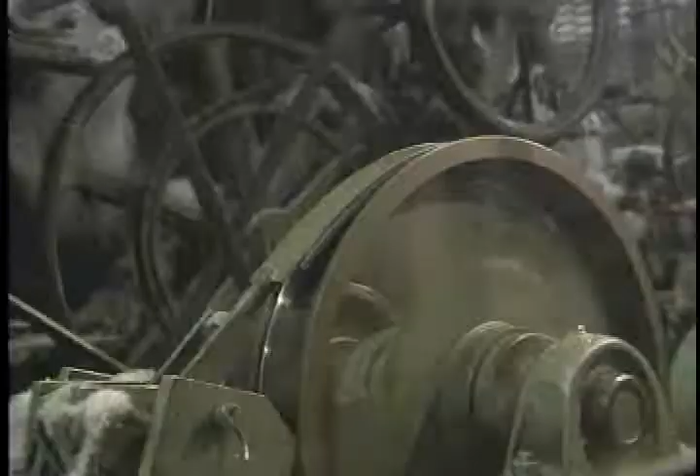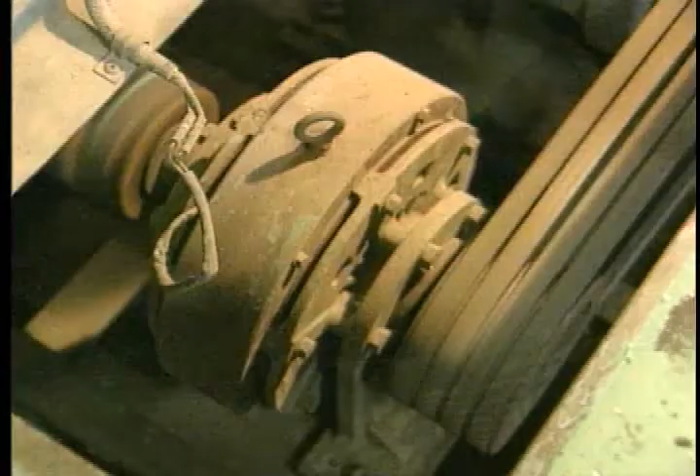Brakes and clutches are used in industry, and their continued reliable operation is critical. Downtime is usually expensive, and failure of a brake or clutch can mean serious property damage and personal injury. To keep things running efficiently and reliably, you must be able to set up and maintain brakes and clutches correctly, and you should be able to spot problems early, before they lead to a breakdown.

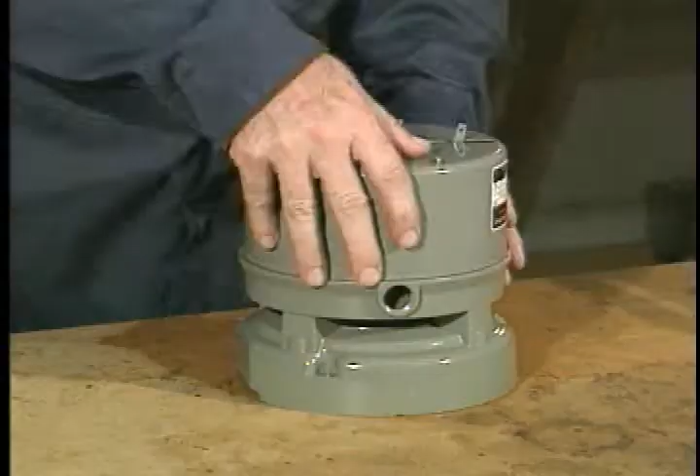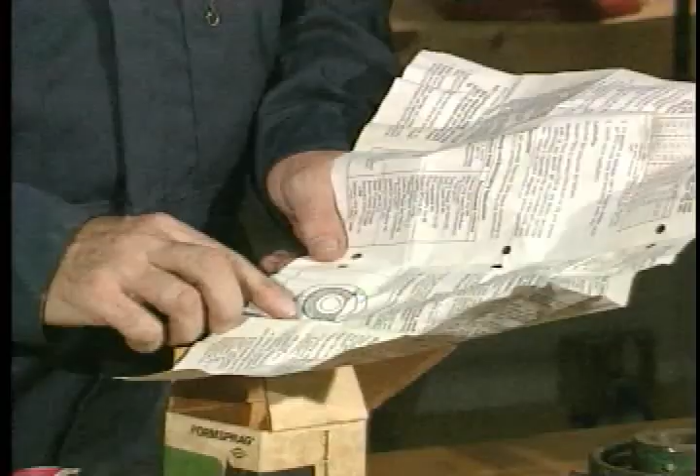In this lesson, we'll see how brakes and clutches work, what kind of maintenance they require, and what conditions can cause them to fail. We'll also show you the kinds of operating conditions that accelerate normal wear, and how to keep them in good operating condition.

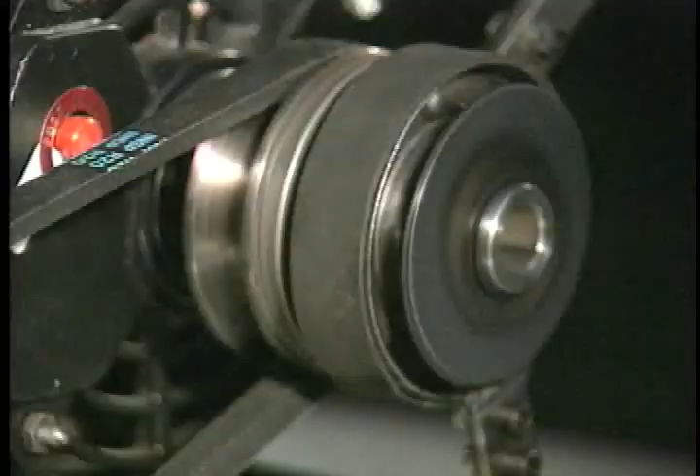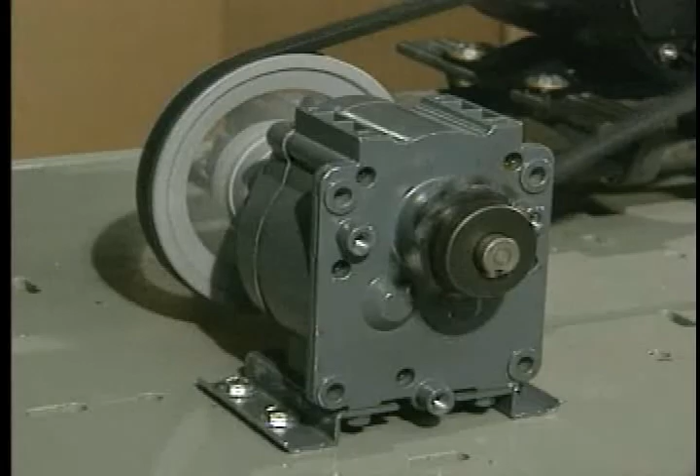Let's start with what clutches and brakes do. Clutches have an input connected to a driver, usually a motor, and an output connected to whatever is being driven. Most clutches can disconnect the input and output completely at startup, letting the motor start up and run without a load. Most can also slip, so the motor can bring the load up to speed gradually. Finally, clutches can connect the input and output firmly, so the motor drives the load at full speed with no slip. In most cases, when a clutch is fully engaged, both the input and output turn at the same speed.

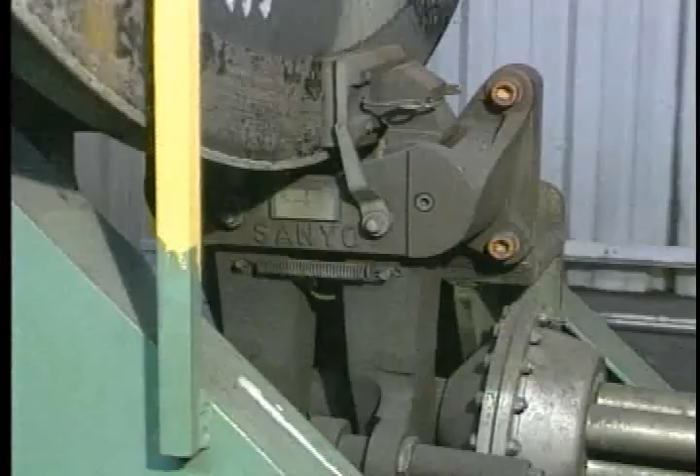On the other hand, a brake prevents the input from turning. When the brake is released, the input can turn freely. When it slips, there's some drag on the input. And when the brake is fully applied, the input is locked to the output—nothing turns. Now, some clutches and brakes do not allow slipping. These positive engagement clutches and brakes are either locked up or free, nothing in between, no slipping.

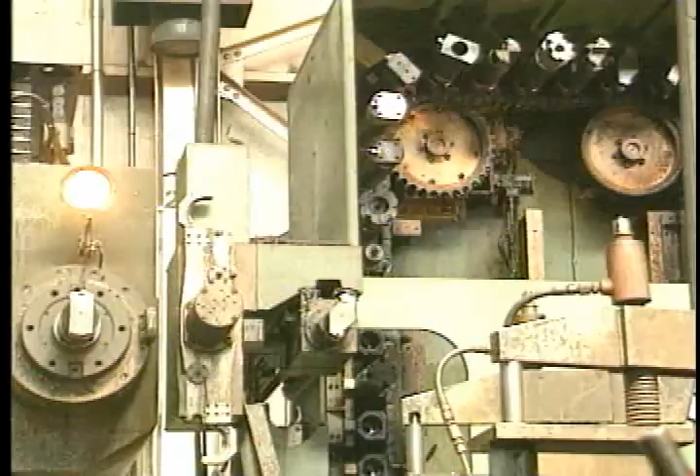Positive engagement brakes are often used to hold a shaft in position while a tool is changed or a machining operation performed. Some positive engagement clutches and brakes engage or disengage automatically, depending on which way things are turning.

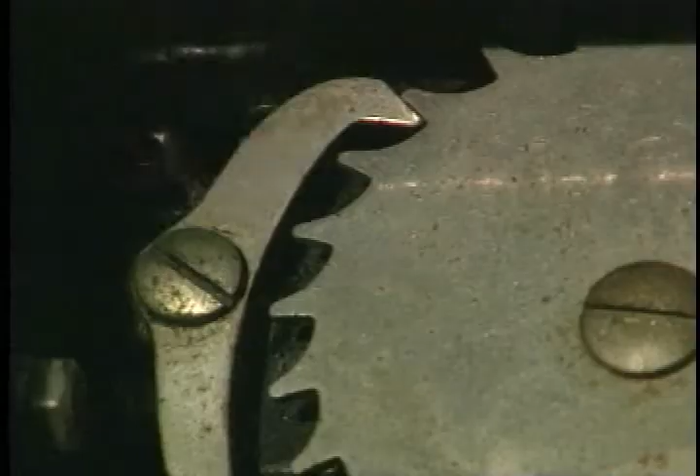A ratchet is a simple example of a one-way positive engagement brake. The wheel can turn freely in one direction, but will not go the other way. Sprag or cam clutches do the same thing, but they are smoother and quieter because they have no teeth.

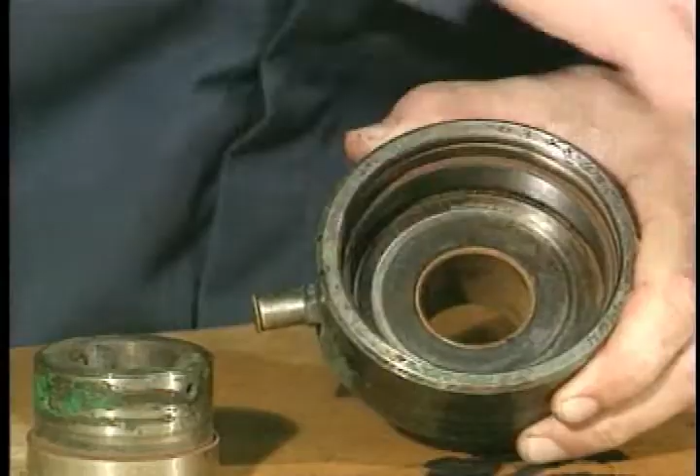Instead, a smooth cylinder, called the inner race, rotates in one direction inside an outer race. Between the two races are sprags or cams. When the inner race rotates in one direction, the sprags or cams cannot grip the outer race. But when the direction of rotation is reversed, they jam tightly between the two races, connecting them.

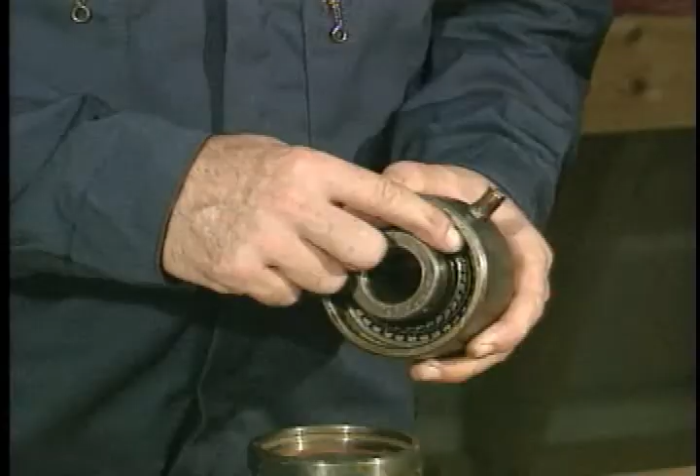When used as a brake, one race is fixed. The other race, like a ratchet wheel, will turn freely in one direction, but won't turn at all in the other direction. When used as a clutch, the output can coast, freewheeling or overrunning when the input slows or stops.

If you ever have to replace a one-way clutch or brake, make sure the new unit engages or locks up in the same direction as the old one did. Some lock up clockwise, some counterclockwise.

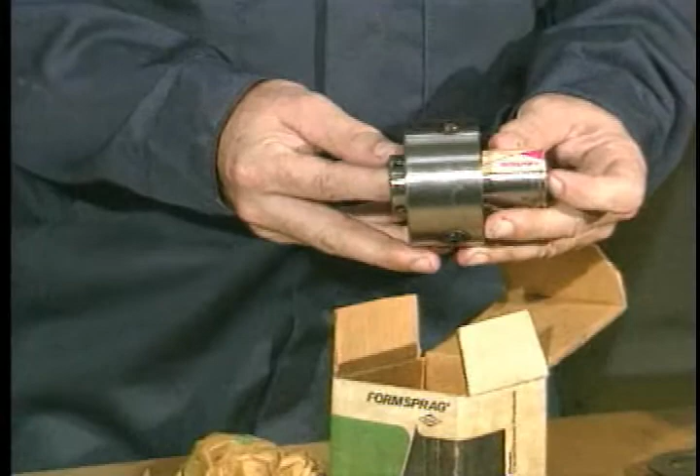Virtually the only maintenance required on a sprag or cam clutch or brake is proper lubrication. Most units are mounted on horizontal shafts and use oil, but sometimes a grease will be required when the unit is mounted vertically. In either case, use the lubricant specified by the manufacturer.

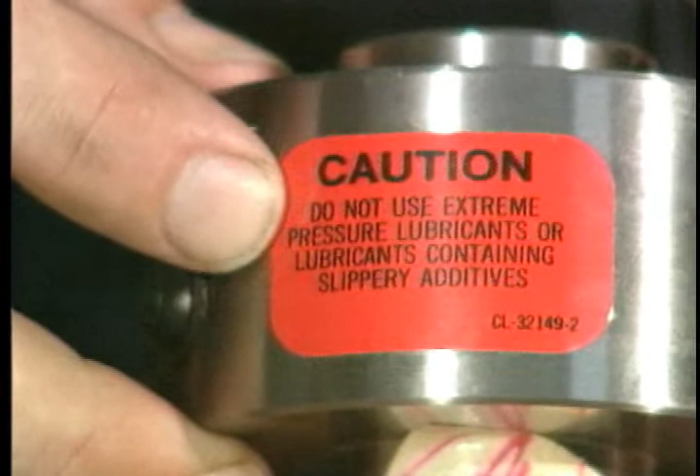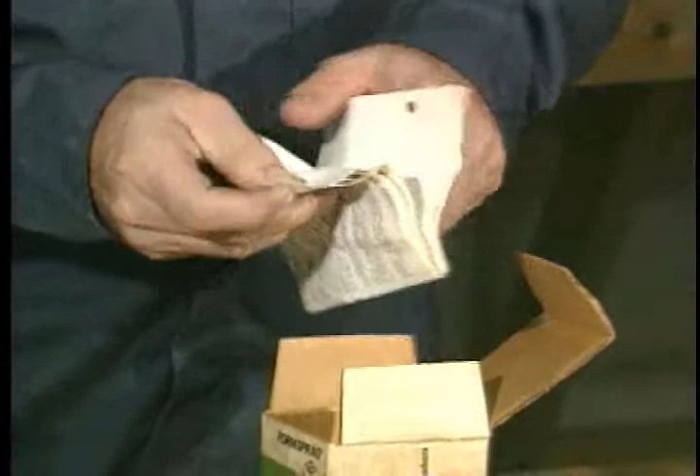Never use a heavy oil or any lubricant rated for extreme pressure service, because it may prevent proper gripping of the sprags or cams. Do not overfill—too much oil will increase drag. Half full is generally enough, especially when speeds are high. Slower operation can tolerate higher fill levels, but again, follow the manufacturer's instructions.

Okay, ratchets, sprag clutches, and other positive engagement clutches and brakes do not allow slip. They are either disengaged or locked up. However, most clutches and brakes can slip, and this allows them to start and stop loads smoothly.

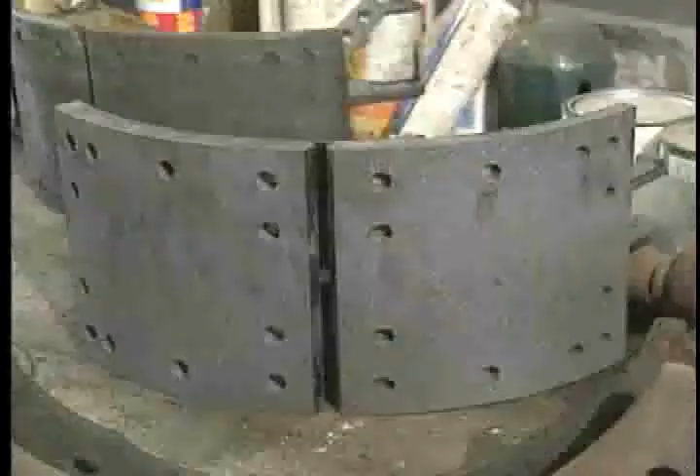Frequently, the slip takes place between dry friction facings and a steel surface. The friction facings are usually non-metallic composition linings, although sometimes metals like brass are used. The steel surface may be either a disc, like this, or a drum, like this.

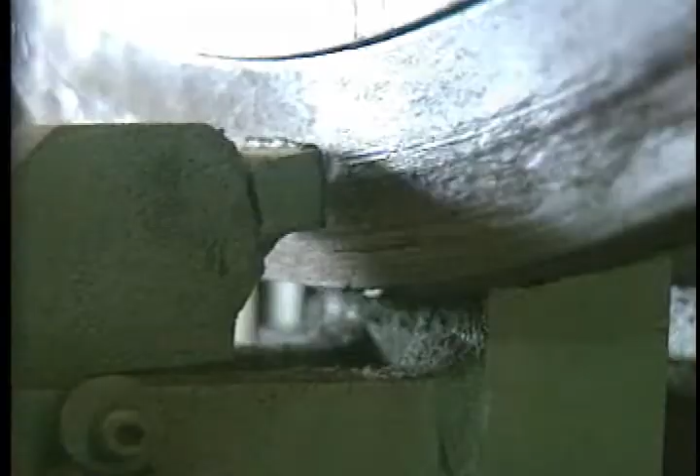Friction allows a clutch to transmit the torque that accelerates and drives the load. And it allows a brake to slow the load down and stop it.

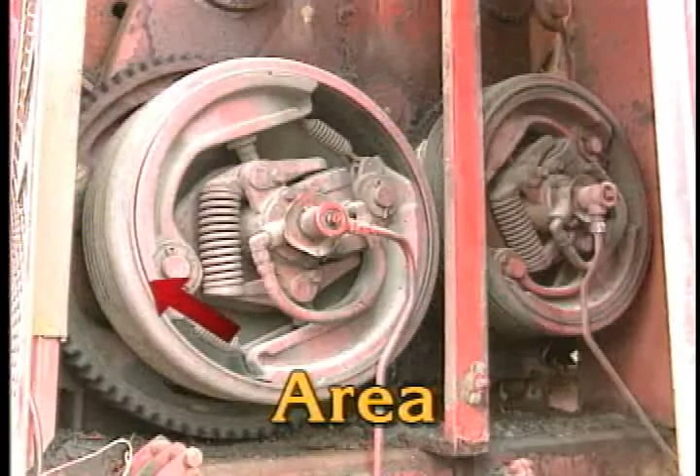Friction depends on three things. One is the area of the surfaces that are in contact with each other. The larger the friction-facing area, the more torque a brake or clutch can transmit. To increase friction, many clutches and brakes may have multiple friction surfaces.

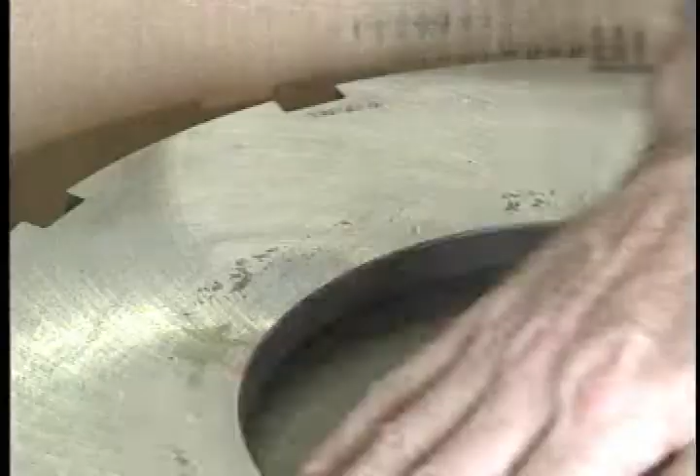Another factor that determines friction is the condition of the contacting surfaces. In most clutches and brakes, these surfaces must remain dry and clean. Moisture or any other contamination can drastically alter the friction and change the performance of the brake or clutch.

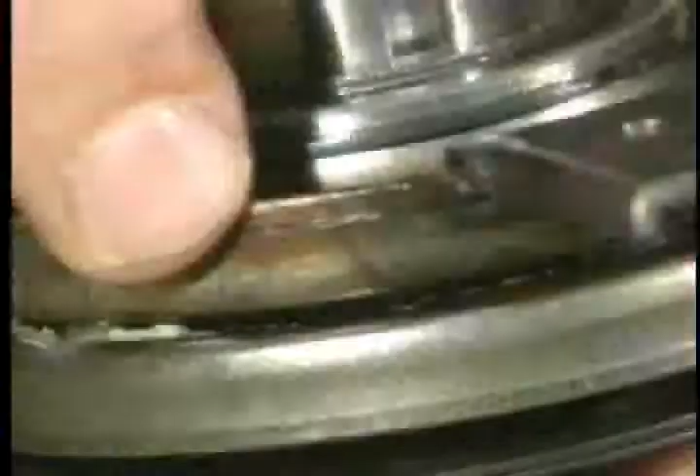Friction also depends on the pressure between the friction facings and the steel surfaces. In some clutches and brakes, both the contacting surfaces may move, so the force may have to be applied through a thrust bearing of some kind.

Whatever type of bearing is used, it may require maintenance from time to time. Sometimes that will mean lubrication, other times adjustment of components. Be sure to follow the manufacturer's instructions.

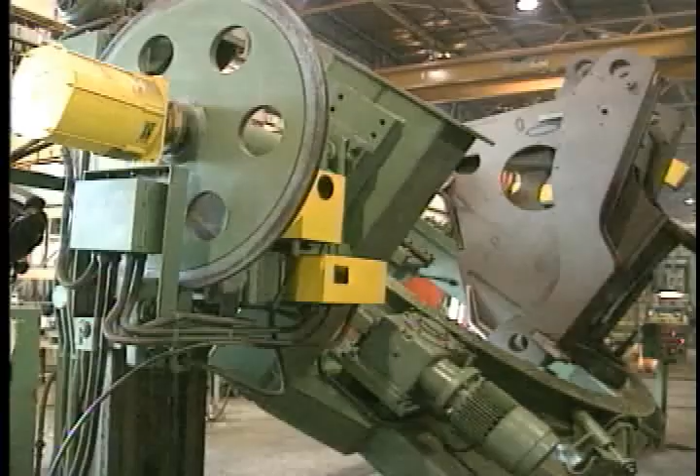Now, just because a clutch or a brake is designed to allow slip does not mean it is intended to slip all the time. Most dry friction clutches and brakes are designed for intermittent slip only.

Slipping that occurs too often will wear out the clutch or the brake. Slip also produces heat. The longer the period of slip and the greater the pressure while the slip occurs, the greater the heat produced. Now, heat causes lots of problems.

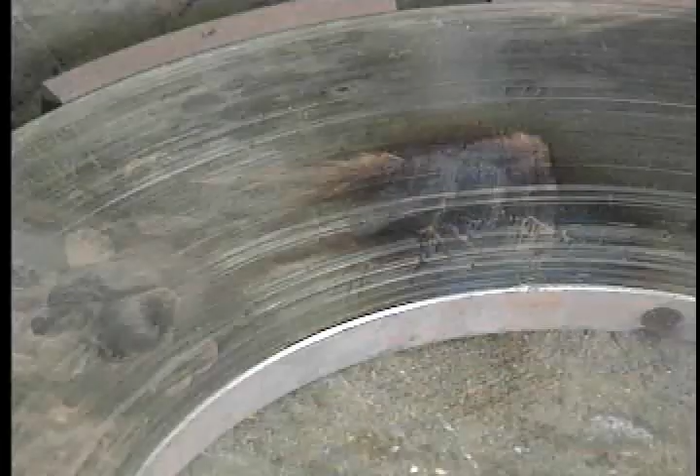Brakes that are overheated may fade, and an overheated clutch may not be able to drive the load without slipping. Clutches and brakes that get hot enough to smoke may be seriously damaged. Overheated friction-facing material on brakes and on clutches can weaken and break up, or it may just wear away rapidly.

Very high heat can cause steel drums and discs to warp or crack. Nearby bearing seals may deteriorate. If lubricants leak out into hot parts, smoke and fire is possible.

The important thing to remember about slip in friction clutches and brakes is that any more slip than normal will cause excessive wear and heat and early failure.

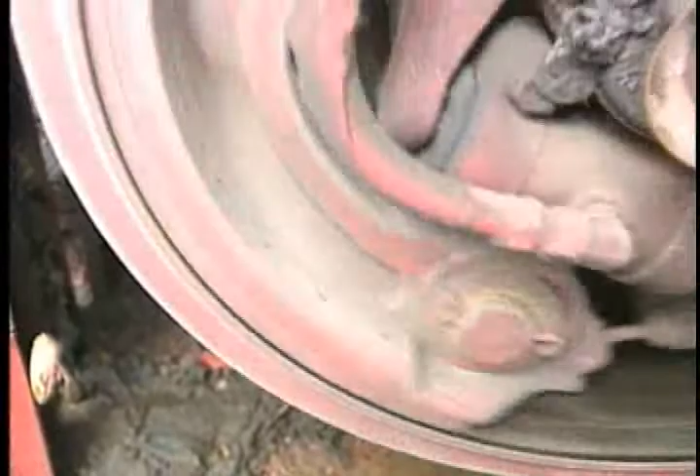For example, a clutch which fails to disengage fully or a brake that drags will heat up and wear out very quickly. If some parts are warped, bent, or binding, the friction facings and the steel may not be separating completely because the gap between the facings and the steel may be very small.

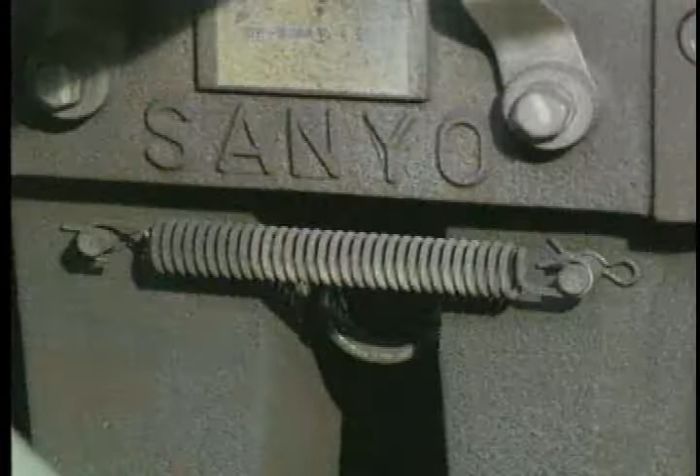Many units have springs of some kind intended to push the facings apart when the pressure is released. They may be weak or broken, especially if an operator has been riding them or the operating linkage requires adjustment.

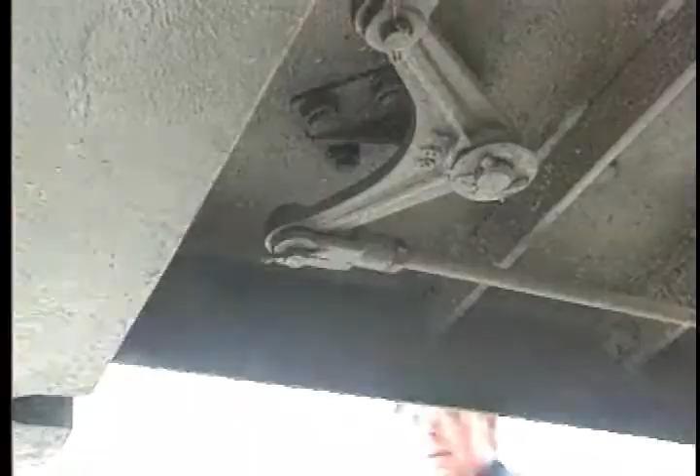Sometimes, of course, clutches slip and brakes cannot hold the load because the load is too large. Something in the machinery could be tight, binding, or overloaded.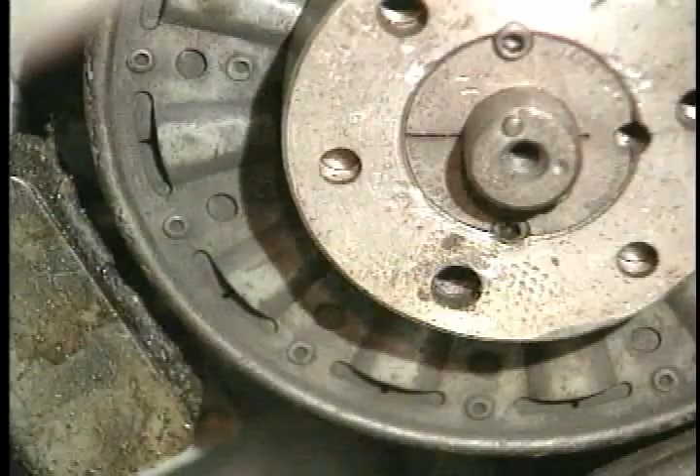Clutches and brakes may also wear out if they are cycled too frequently. A clutch can start a load and a brake can stop a load only so many times an hour. Cycling it faster than its rating will cause it to overheat because it will not be able to dissipate the heat generated during each cycle.

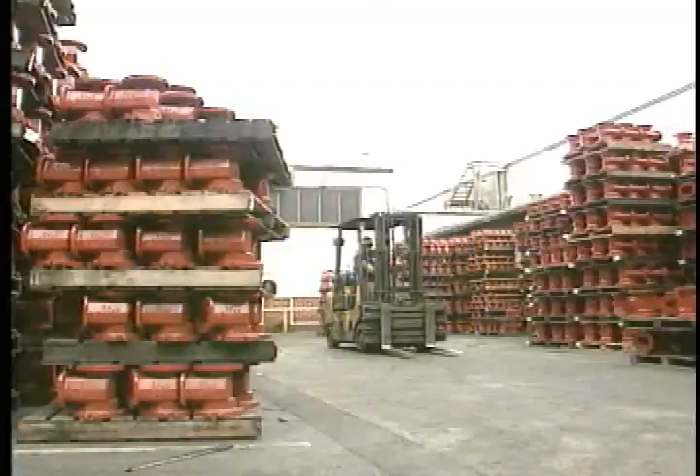However, even if the duty cycle is normal, a clutch or brake may slip more than normal because of inadequate friction. Lack of friction can be caused by many things, but the most common are inadequate pressure, contamination of the friction facings, or damage to the friction facings.

Anything that interferes with full pressure being applied will cause slip. For example, if an operator rides a clutch or brake, it will not be fully engaged. In addition to slip and heat, riding a clutch is also likely to wear out the thrust or throw-out bearing,

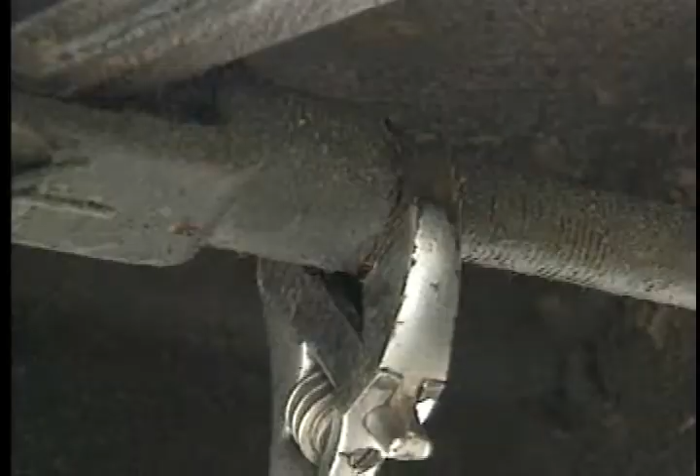which disengages the clutch. Sometimes, worn or misadjusted linkages can reduce pressure enough to cause slip. In some units, inadequate pressure can be a result of wear of the friction facings.

The condition of the friction surfaces can also cause excessive slip as well as other clutch or brake problems. Contamination can cause some clutches and brakes to grab and chatter or slip. To help prevent contamination during operation, make sure all seals are replaced when necessary. And when installing new clutch or brake facings, work in a clean area.

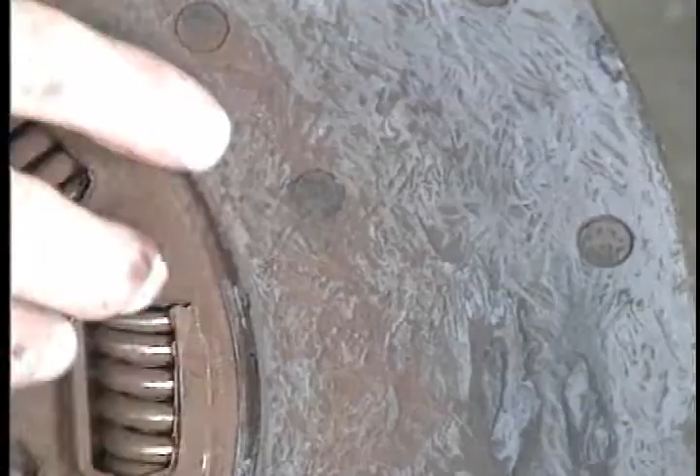Some wear is unavoidable, but excessive wear can expose the screws or rivets which hold the friction facings in place, and then the steel surfaces can become grooved and damaged. Discs, plates, and drums may all need to be resurfaced or replaced if wear is allowed to become excessive.

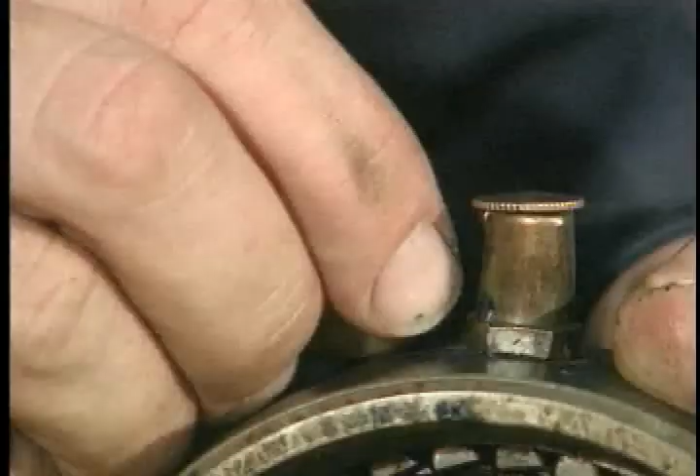Finally, contamination may also roughen up the surfaces and lead to wear. To help keep out grit and dirt, make sure all inspection and lubrication covers are in place.

Okay, now let's apply this information to the maintenance and troubleshooting of specific friction units that you're likely to find in your plant.

But first, let's talk about asbestos, which may still be used in brake and clutch facings. During disassembly and reassembly, make sure you know the procedures for working with asbestos in your facility. Never blow out dust with an air hose, and do not drill, saw, grind, or file friction facings without some way to collect the dust safely.

Now let's look at procedures for several types of friction clutches and brakes: the overload or slip clutch, the centrifugal clutch, and electrically operated, pneumatically operated, and hydraulically operated clutches and brakes.

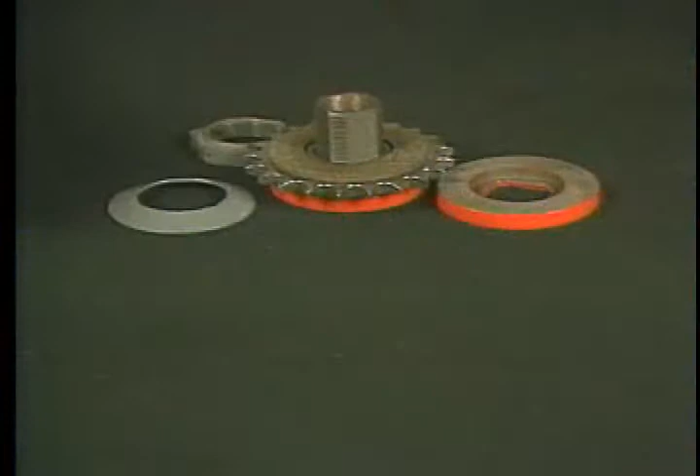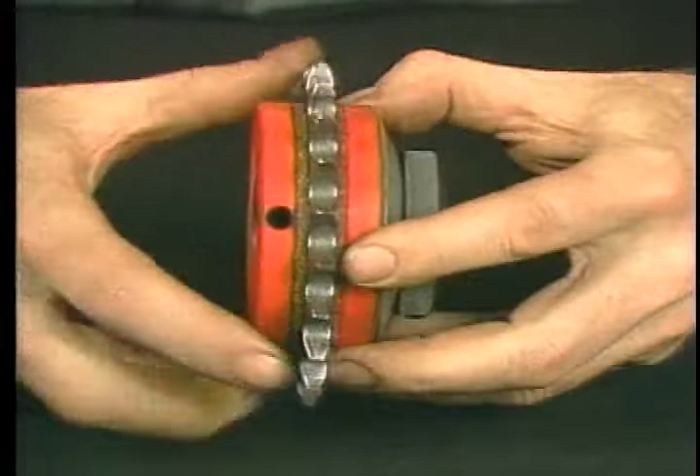Slip clutches are very common and fairly simple. Springs squeeze the friction facings on a steel surface hard enough to prevent slip during normal machine operation. But if the machine is overloaded, the clutch slips. Usually, the only maintenance they need is an occasional readjustment as the friction facings wear down. When this happens, the springs apply less and less pressure, and the clutch may slip before it is overloaded.

Centrifugal clutches often use springs to hold the facings away from the drum until the speed of the input shaft reaches its cut-in speed. But as the facings wear thinner, the springs must stretch farther, and the unit may slip.

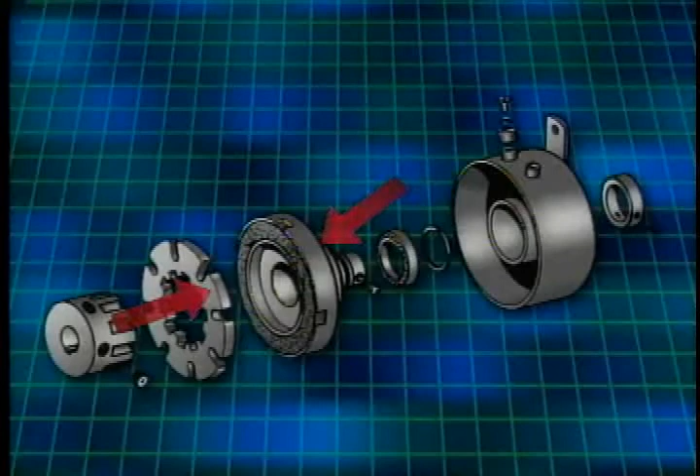Many friction clutches are electrically operated. Current in an electromagnet produces the force that presses the friction facings and the steel surface together. If the electromagnet is attached to the input or to the output, it must rotate also, and current is usually fed to it through slip rings and brushes.

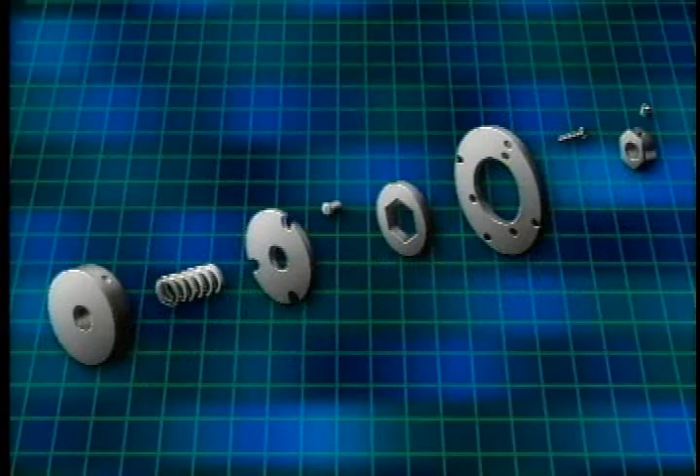Electrically operated brakes work much the same way, but are usually a little simpler because there is only one rotating part, and the electromagnet can always be stationary.

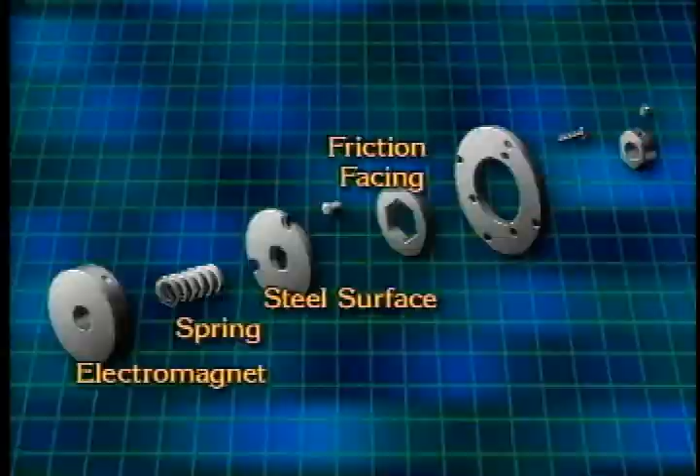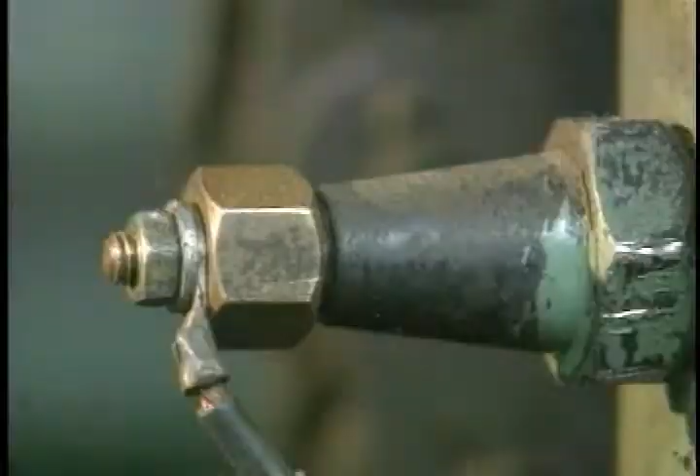Electric brakes and clutches usually have few problems. If they don't work when voltage is applied, check to see that the armature is free to move and that the coil is not burned out. If there are slip rings and brushes, make sure they're not sparking, worn, or dirty. If they are, replace them.

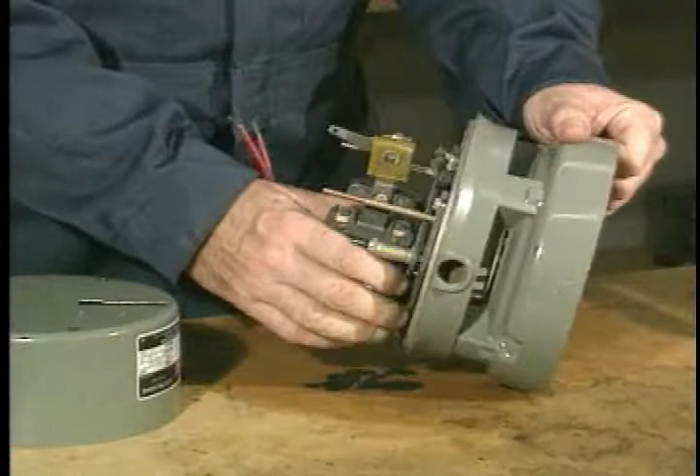Electric brakes mounted directly on the motor are very common. Generally, they keep the motor braked whenever power is not applied, so they are released only when power is sent to the motor. Any malfunction which interrupts the electrical supply to the motor also applies the brakes.

Springs usually supply the force that keeps the brake applied as long as the power to the motor is off. When the motor is switched on, a solenoid coil wired into the motor circuit pulls the spring back, releasing the brake. In some units, the release mechanism automatically compensates for wear of the friction facing. Other units, however, may require periodic adjustment.

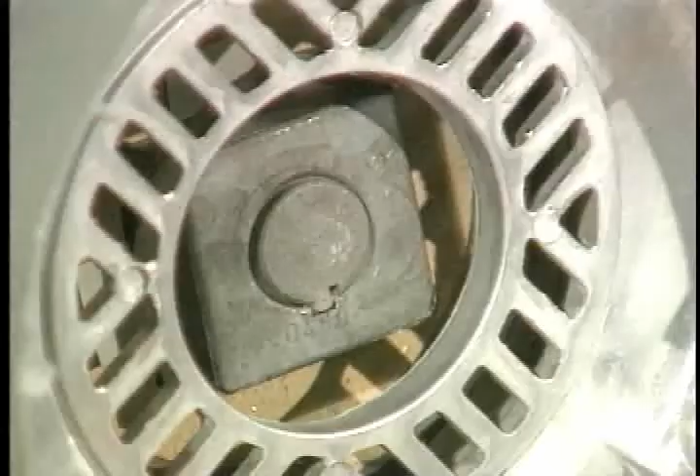Usually, troubleshooting this kind of unit is easy. Make sure the release linkage is free to move, that the discs are not warped, and that they do not bind in the housing or on the shaft, and that the solenoid and its coil have not burned out. You can use an ohm meter to test resistance or continuity across the coil.

If the brake does not stop the load fast enough, compare the friction disc thickness to the manufacturer's specifications. Replace the friction disc if it is too thin. Or the spring may require adjustment. Tightening the spring will apply more pressure, stopping the motor faster.

Some of these kinds of brakes have a manual release, but don't rely on it to hold the brake completely off. If the solenoid is not holding the brake fully released, do not run the motor until you find out what the problem is.

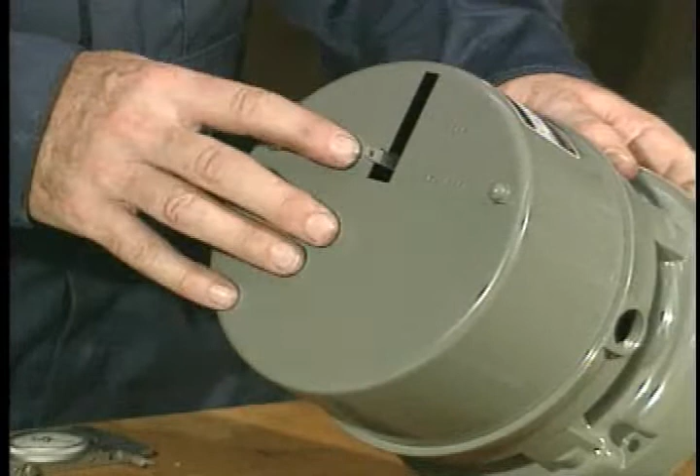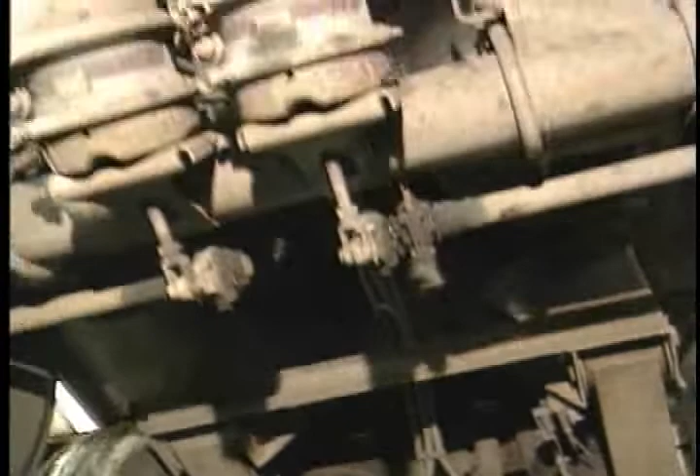Clutches and brakes are also operated pneumatically with air and hydraulically with fluid. Some brakes are fail-safe units in which pneumatic or hydraulic pressure prevents the brakes from being applied. If pressure is lost, the brakes lock up.

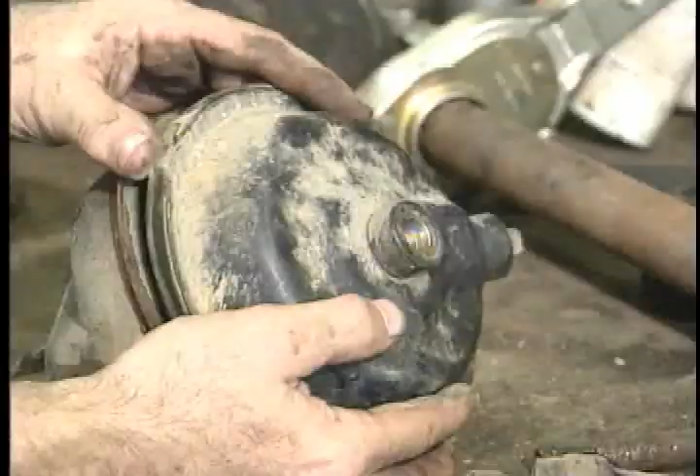Pneumatic brakes and clutches are typically operated by a piston with seals or by a flexible diaphragm. Compressed air pushes against the diaphragm, which compresses a spring and applies the brakes.

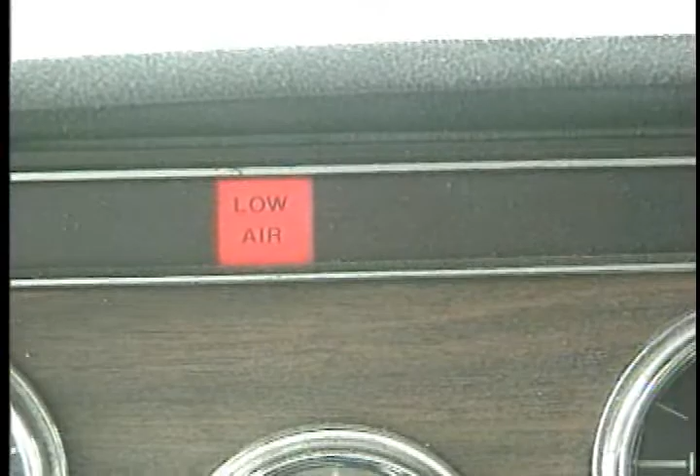Troubleshooting is usually simple. If the unit does not come on or if it slips a lot, the first thing to check is the air pressure or fluid level. Check the friction facings for wear or for damage or for contamination. Check the springs. They may be weak or broken or out of adjustment.

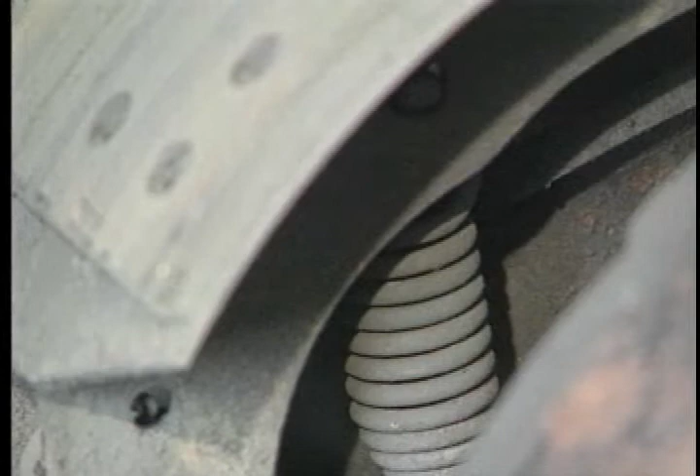Finally, check for air or oil leaks in the piston seals, the diaphragms, the unions, and the hoses. Eventually, if used often enough, every brake or clutch will have to be rebuilt or replaced.

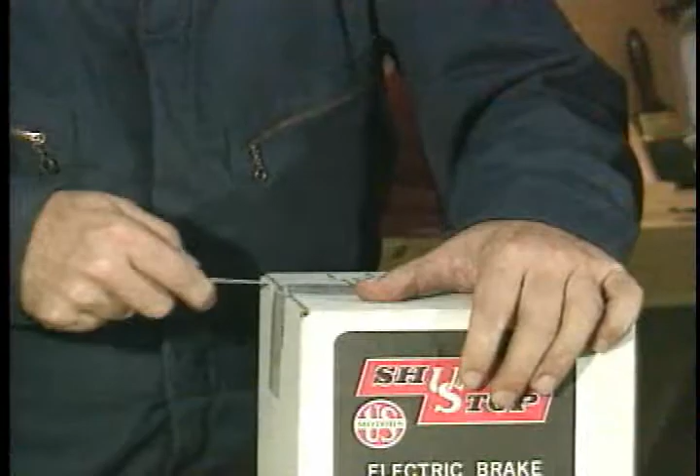Rebuilding them can often be done by ordering replacement parts from a supplier. These parts may be supplied as individual components or as rebuild kits.

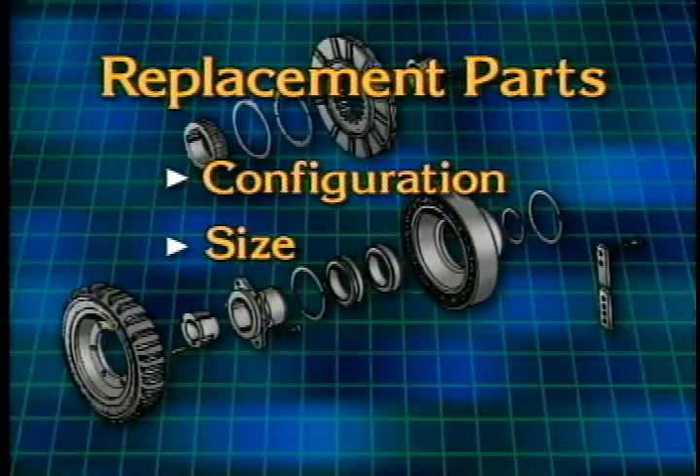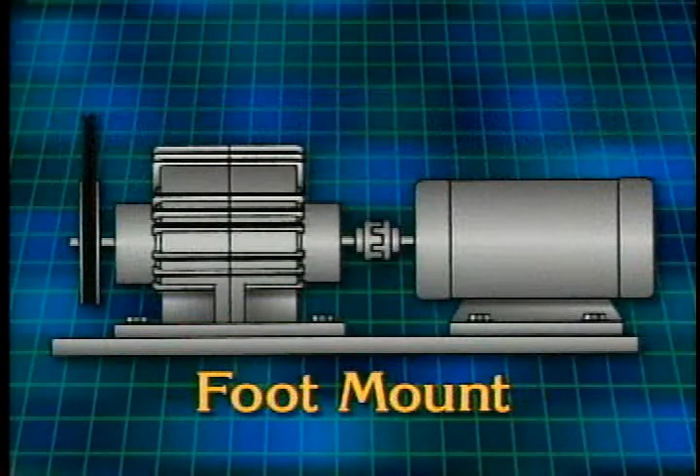When replacing an entire unit, there are three main areas to consider: the configuration of the brake or clutch, the size, and the installation. There are three major ways to mount a brake or clutch: the common C-face mount directly on the motor, a foot mounting, usually between the motor and the gearbox or between the motor and the load, and a shaft mount, in which the shaft is split.

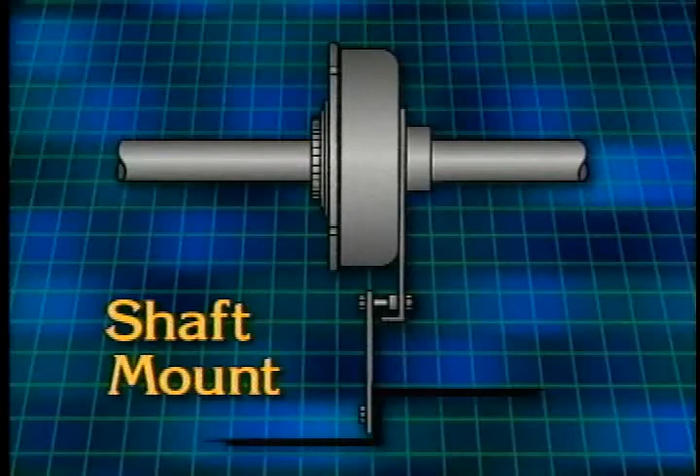The shaft goes straight through the brake or clutch, or part of the unit is mounted directly on the machine. Normally, unless the application is changing, the replacement unit will be the same configuration as the original installation.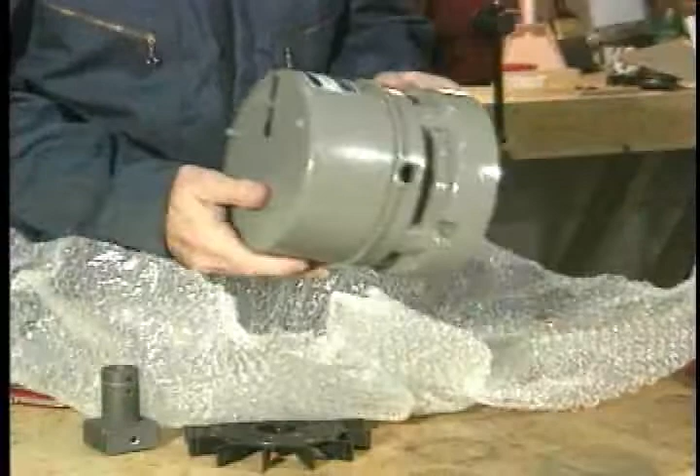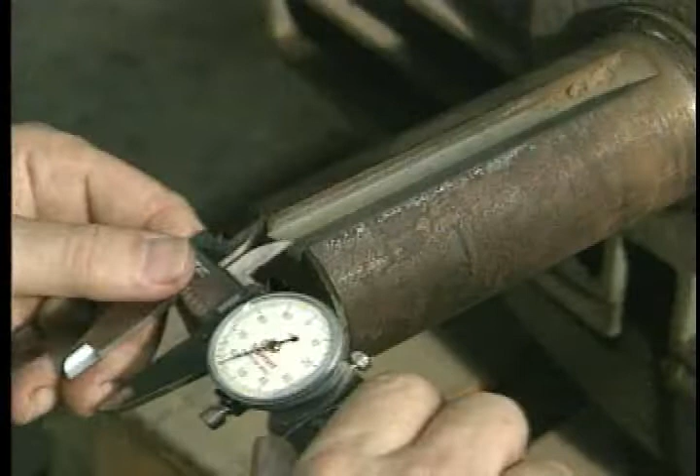However, the sizing of the unit may change, usually because of a change in the application or because the old unit wore out too quickly. The first step, of course, will be to check the dimensions of the old unit to make sure whatever new unit is ordered will actually fit.

Sometimes special units or adapters may be ordered to fit existing shaft sizes or existing bolt patterns in the mounting. This can significantly reduce the time and expense of installation. If the unit is electrical, check the required voltage level as well. Typical voltages are 6 volts, 12 volts, 24 volts, and 90 volts.

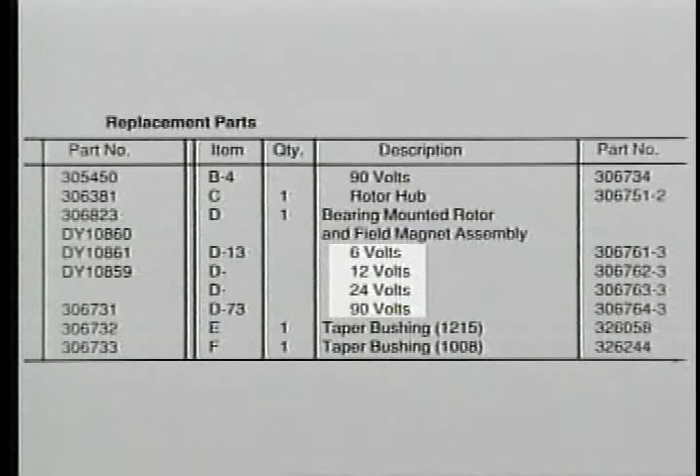Next, you must determine the size and model number from a particular manufacturer. If the same manufacturer is being used, then the model numbers may match, but if suppliers have changed, you may have to select a substitute.

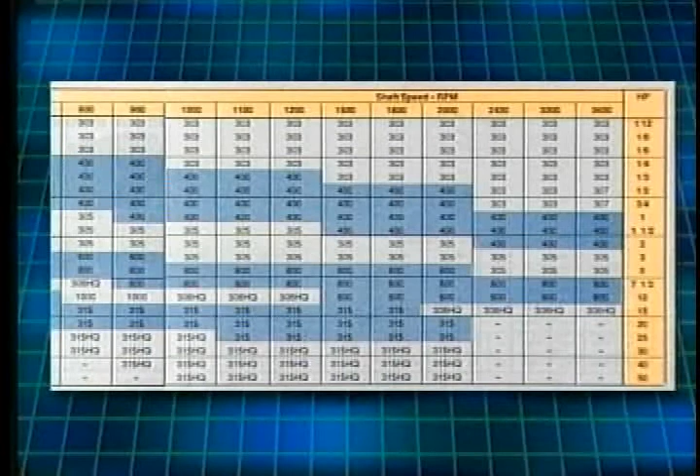Generally, this will be done based on the horsepower of the system and the shaft speed at the clutch or brake. Most manufacturers provide model selection charts for their products, which can be used for the most common applications.

For example, if an application is powered by a 40 horsepower motor operating at 1800 RPM and powered through a 2-to-1 reducer, this manufacturer's selection chart indicates that a Model 315HQ will be required.

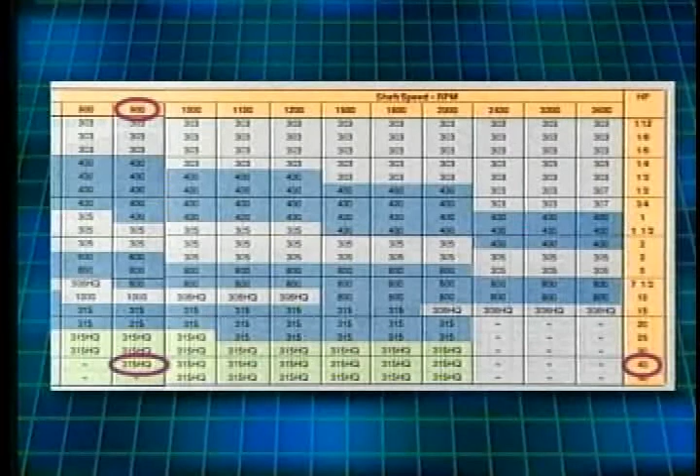Notice that most sizes of clutches and brakes can be used in a wide variety of applications. As long as your application falls somewhere close to the middle of the range, the new unit will probably operate well. The exceptions will be if the unit must cycle on and off frequently, if loads are too great, or if temperatures are too high.

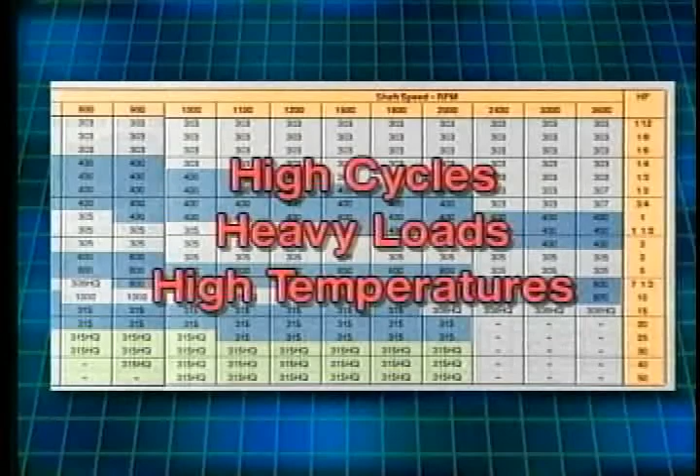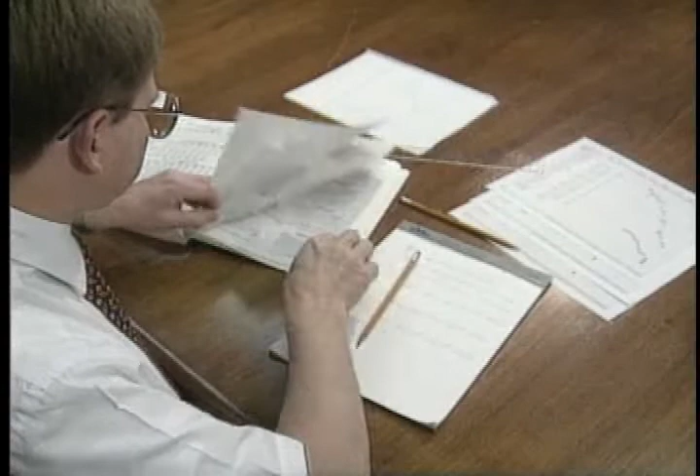In general, if the unit must cycle on and off more than 15 times per minute, or if a more cost-effective match between the brake or clutch unit and its application is desired, then a more detailed analysis can be undertaken. This usually involves calculations of actual inertia, torque, power, and heat dissipation over time in order to develop an estimate of the actual life of the brake or clutch in a particular application.

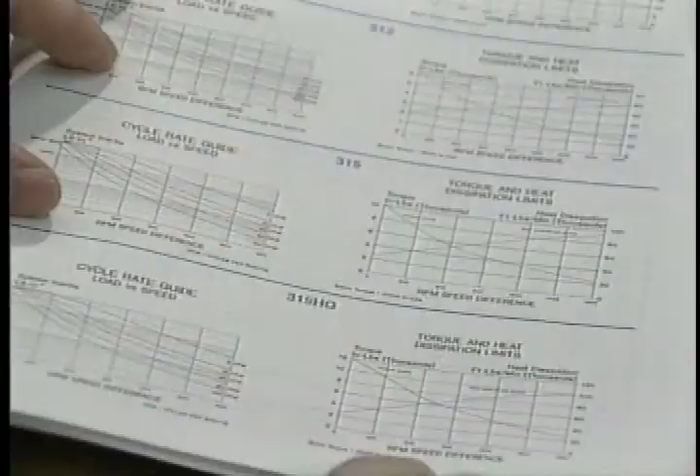After a unit is selected, it must be mounted and aligned. Remember to lock out properly before starting any work at the site. Make sure you know the proper lockout procedure. Make sure you follow it.

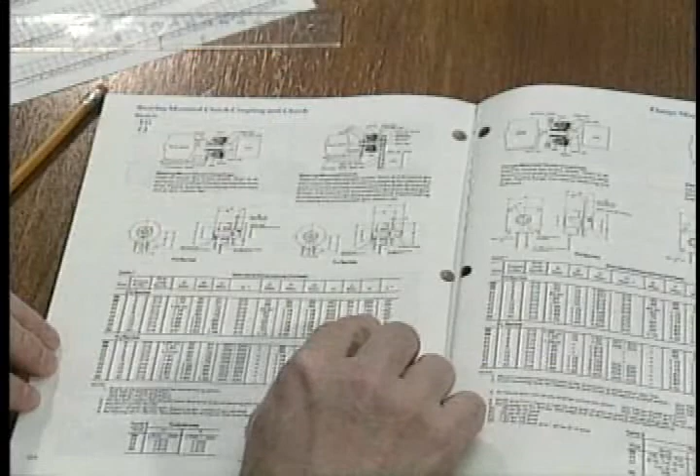You should not attempt to install a new unit unless you are thoroughly familiar with the manufacturer's specifications. Most units require precision alignment, and many require careful adjustment in order to make sure that the correct gaps are maintained after the installation is complete.

When mating a new brake or clutch with an old installation, be sure to check for shaft runout and wobble. This may occur as a result of worn bearings in the motor or in the driven machine, and may dramatically reduce the life of a brake or clutch.

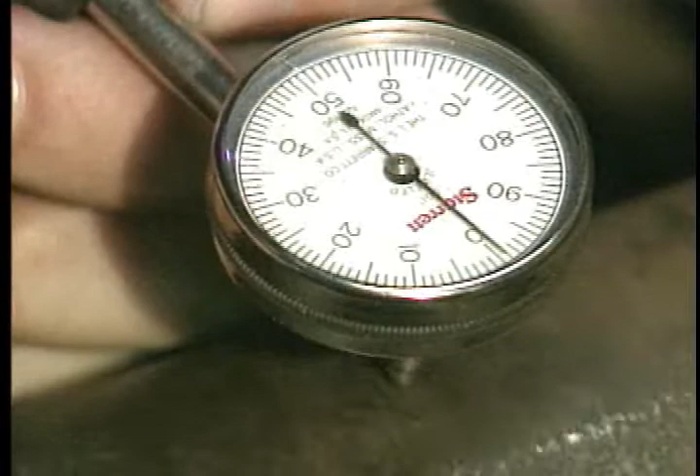After installation, many brakes and clutches may have to be run in or burnished to make sure the friction faces mate properly and that they can develop full torque. Usually, this will happen quickly under normal operating conditions.

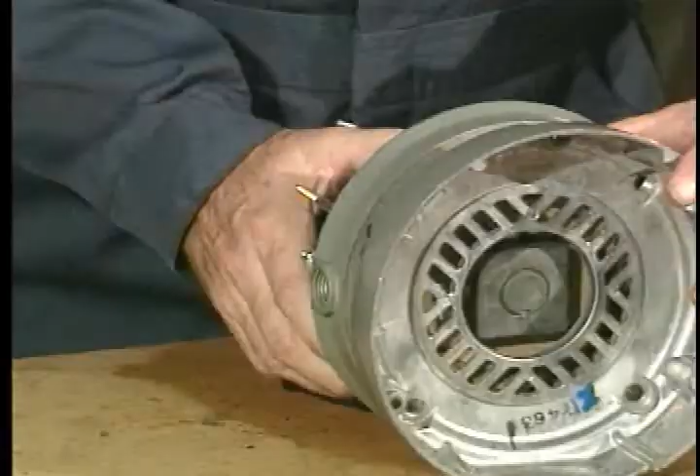In this lesson, we've seen how several different kinds of brakes and clutches work. We've seen what kind of maintenance they usually require. We've seen what conditions can cause them to fail. And we've looked at the major factors to consider when they must be replaced.

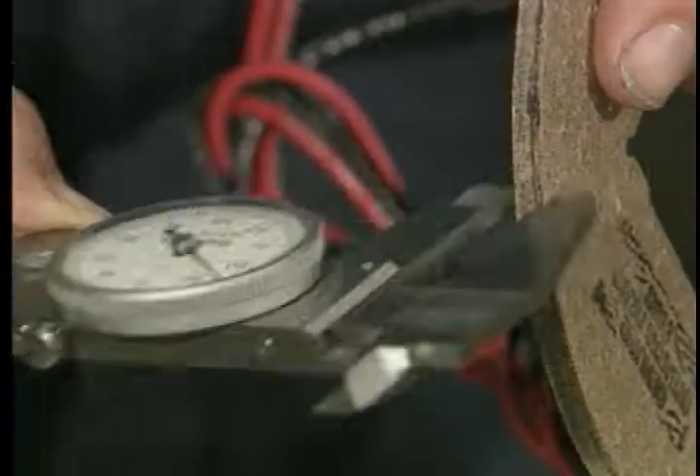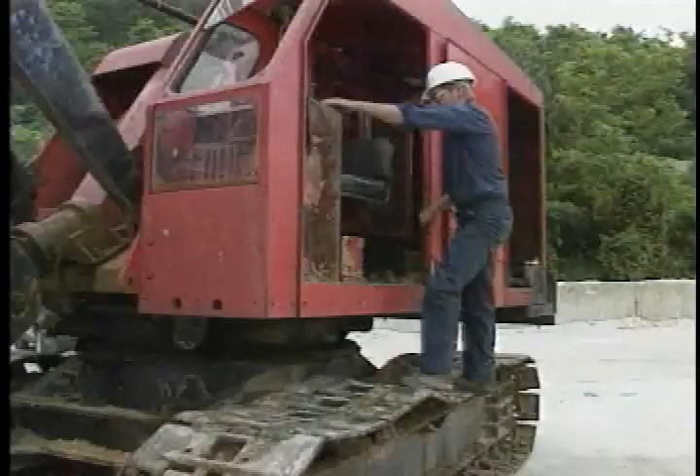Though there are many different kinds of clutches and brakes used in industry, the principles for maintaining them, adjusting them, troubleshooting them, and installing them are all pretty much the same. If you understand how they engage and disengage, and how they slip, you'll be able to keep them running efficiently and reliably for extended periods of time. And you'll be able to get the systems that use them up and running again quickly when things do go wrong.